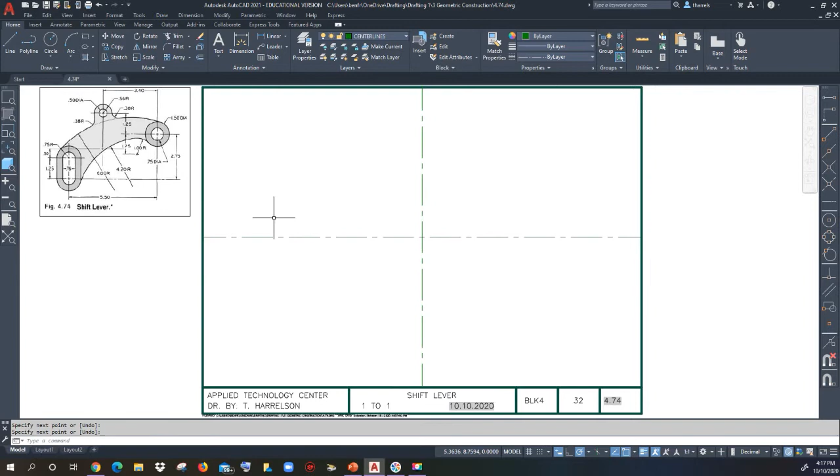So change your current layer to center line, go to the line command, midpoint, and now we're going to offset a 1/2 inch down, here to here. And then I'm going to erase this line so it doesn't confuse me.

So now this is how I'm going to construct the part. So we're going to start with this left-hand side first. So we need to offset this center line down 1.25. So we're going to go to offset 1.25.

Now, from this midpoint, this center line, we have to offset to the right before we can offset back to the left to get the center line for that slot. So you have to look at where things are based from. So we're going to go to offset. Let's put in 3.4. And then from this line, we're going to offset back 5.5.

At this point, we really need to kind of clean some things up so we're not confused when we start offsetting even more center points. So let's use our grips and let's slide some things in. I'm going to leave these two for the moment because I'm going to have to offset this up again. So we're going to offset this line up the 2.75. And then from that line, I can offset up and down 1.25.

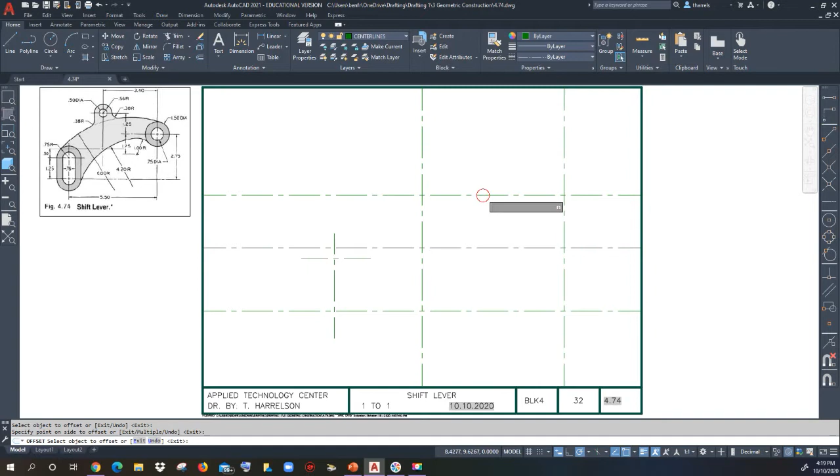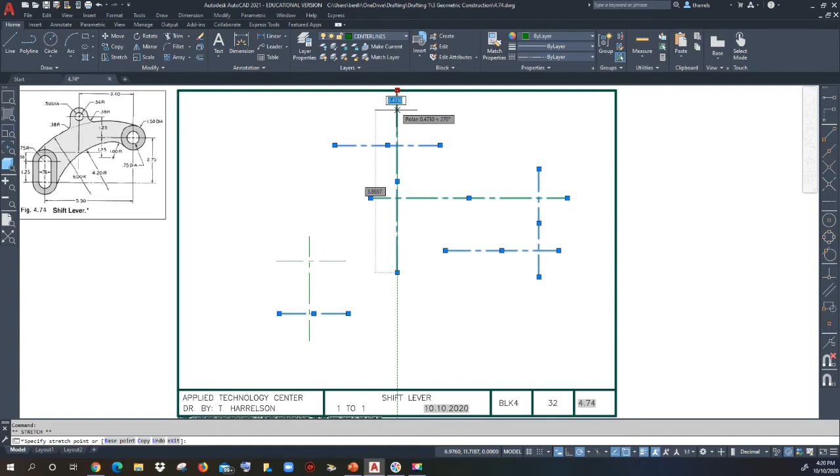Now I do need to clean some things up. So got a stray line up there. Clicked too quickly, so we'll get rid of that. Use your grips and let's pull these center lines in so we're not so confused with what is what. So look at where your dimensions are coming from and look at the lines that you just offset. Now that looks much more manageable. We don't have lines everywhere to confuse us.

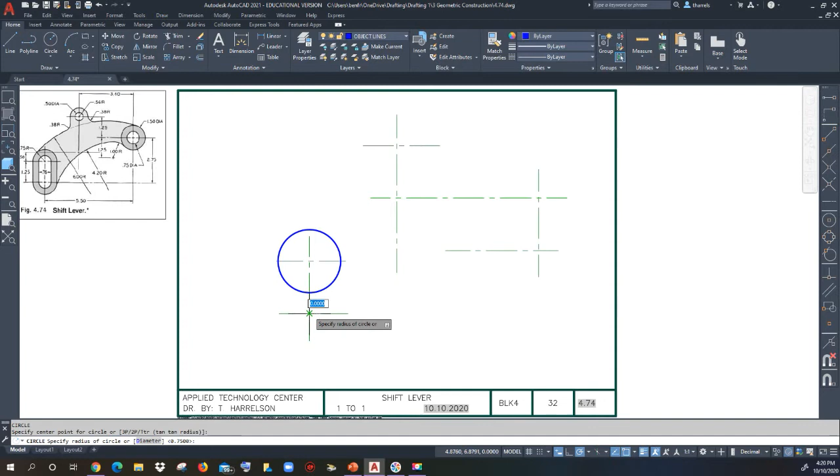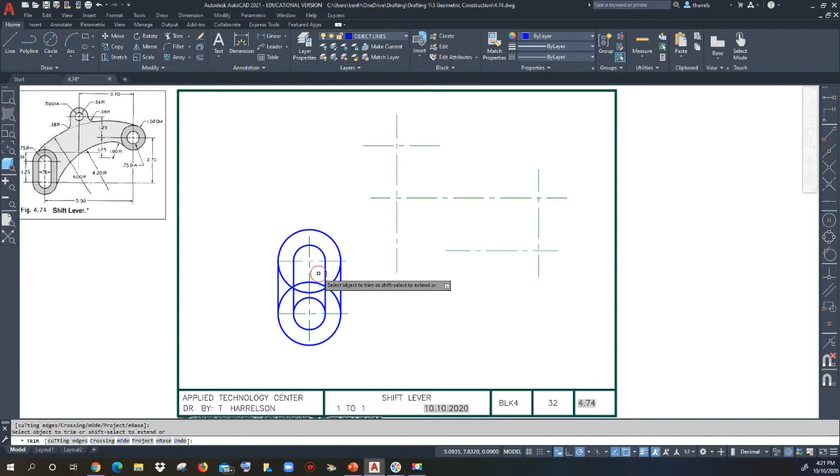So now let's change to our object layer and we can start constructing the part. So you can see on the left hand side we have a radius of 0.75. That intersection. And we have a diameter of 0.76. So now we can use our intersections and our line command. So there is one feature.

So now let's move to the right side of the drawing and place these circles. Pay attention to radius and diameter. Both of these are diameter circles. Let's go ahead and put the circles up at the top. We have a diameter and we have a radius. Now at this point, we have to think about what we can do before we put in these big curves. This large curve is tangent to this circle and this circle. So we're going to use tan radius to create that circle.

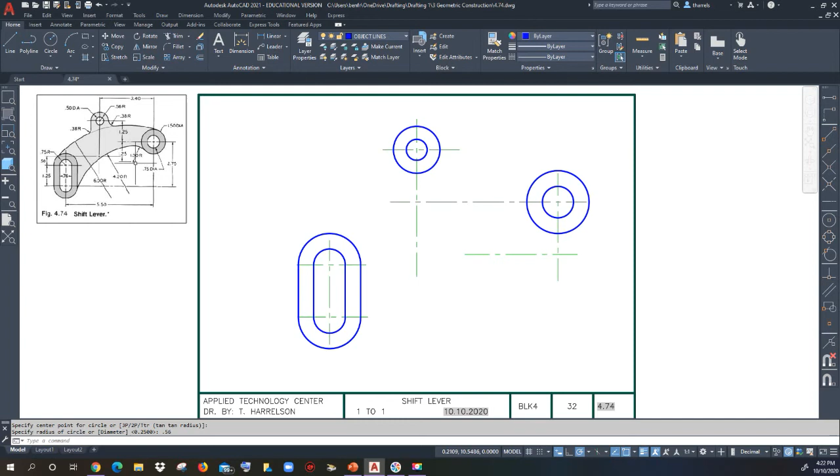This large curve, it is tangent to this 1-inch circle, but we don't have a center point to where that is. And we can't use a fillet because we don't know where this arc is. So you have to look at the part and think how you can construct this. Now on your drawing, I think I've given you the measurement, but on the original drawing, you do not have one. So you have to figure out where this 1-inch lives. How do you do that? That 1-inch circle is tangent to the 1.5 diameter. So it has to touch it at a tangent point, which means from the point it touches the circle to the center point is 1 inch.

So go to offset, 1 inch, and offset the circle out. Where it crosses that center line, that's the center point of your 1-inch radius circle. And you can erase that when you're finished. So now you have your 1-inch circle.

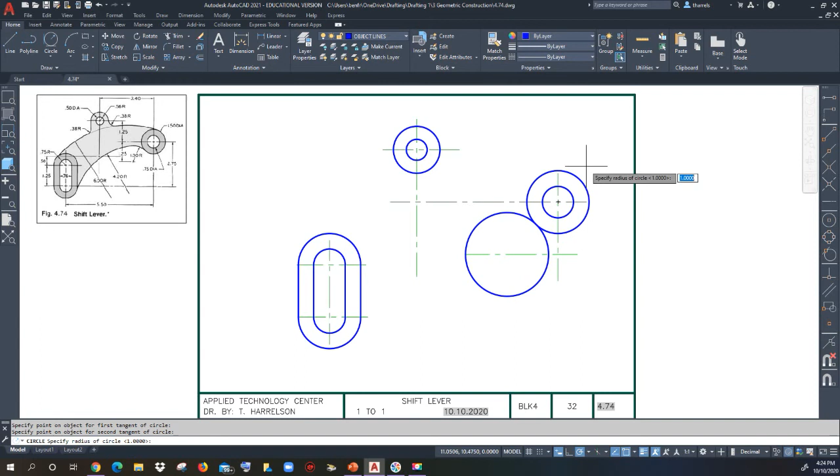So we need to place in the large arcs that are here, but we're going to use the circle command, tan radius. So when I pick tan radius, I'm going to pick the outside of this curve and then the outer right of this one. So this tells my circle to be tangent in this direction. If I pick them too close together, it's going to draw that circle in the opposite direction I want it to go. So once you pick your second tangent, it's asking for the radius, which is 6, and it creates that large circle. You can go to your trim command and trim away what you don't want.

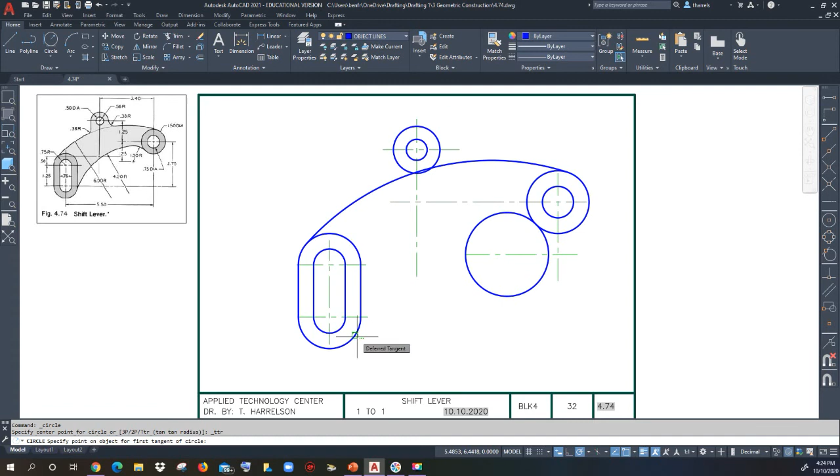You're going to go back to tan radius, pick the lower point down here on this circle and the top side of that 1-inch circle. Your radius is 4.2 and that creates your curve. Now think about what needs to stay and what needs to go. So this part of your arc needs to go away and the outside edge of your 1-inch. So it makes that little dip of a curve. And then you can erase what you don't need.

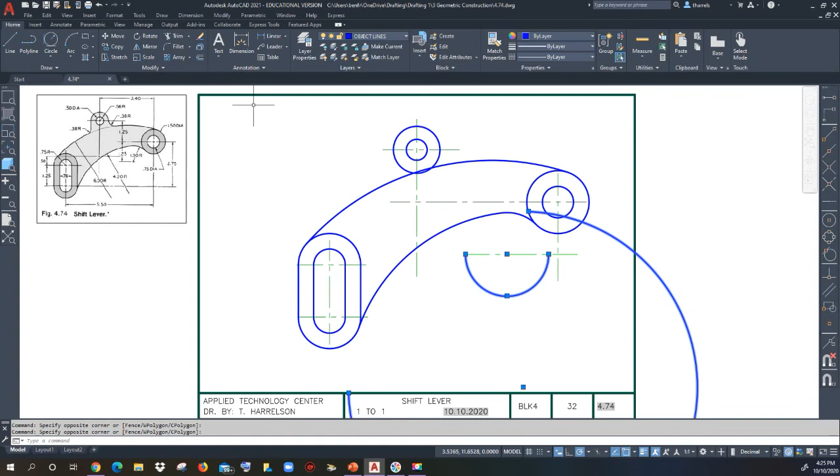So now we need to deal with this portion. So you have to look at how this is created. You have a flat portion right here. If you just went to the fillet command and picked fillet, it would curve this too far in. So just go to your line command, pick the intersection and pull it straight down. That's what you're going to fillet to. On this side of the line, it's actually touching the curve, so you can just use a regular fillet.

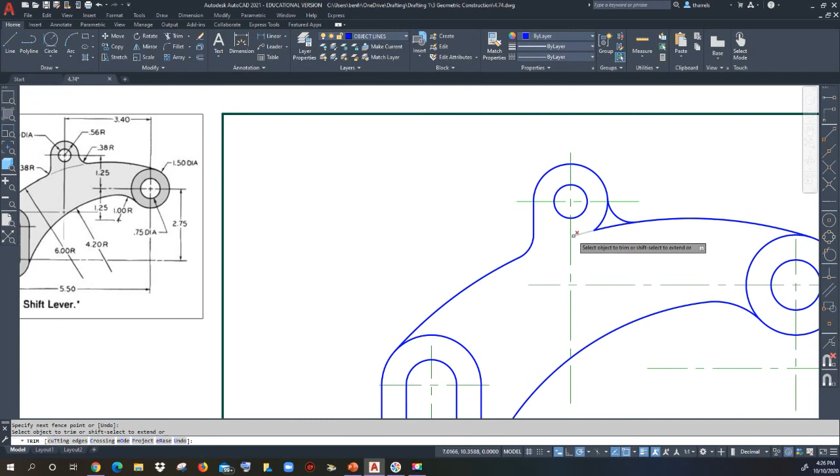So go to your fillet command, right mouse click, radius, 0.38, enter, and I need to do it twice, right mouse click, multiple. So now I'm going to pick my curves and then I'm going to trim away what I don't want. When you're trimming this part, you need to make sure that you zoom in on this little curve, because look at that, you've got a little extra piece. So make sure you get rid of that. Now your part is finished.

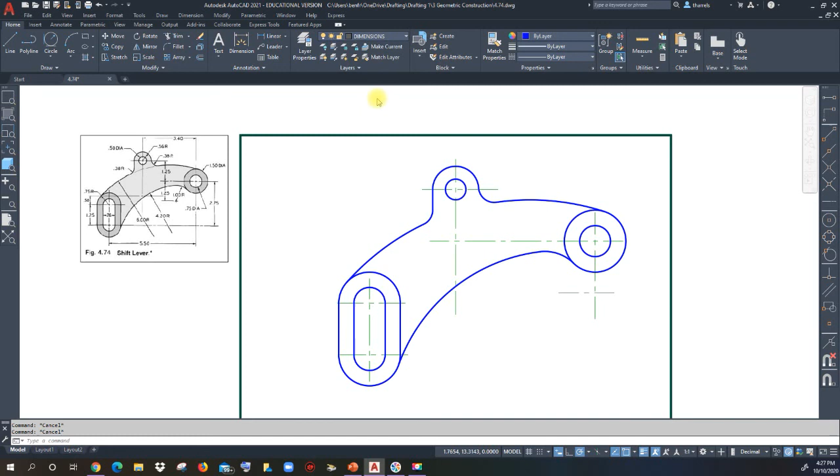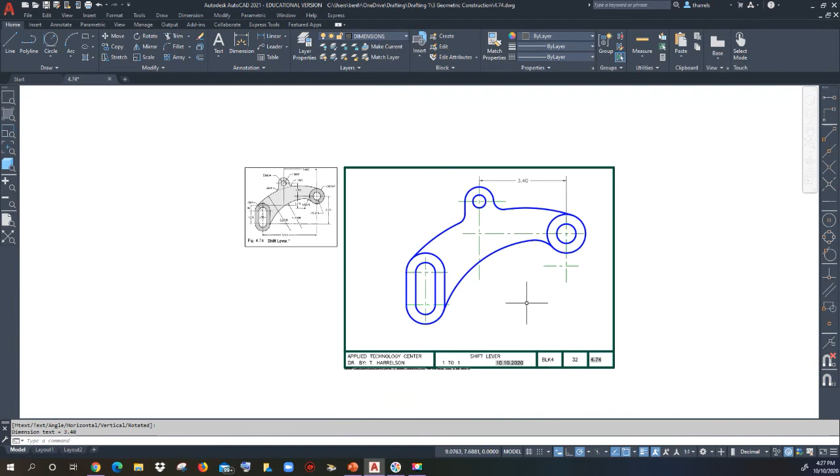You're going to use decimal dimensions. So make sure that you go up to the annotate and then your dimension panel and open that up and pick either fraction or decimals. We are in decimals, so change to your dimension layer for your decimal dimensions, and then you can start placing dimensions on your drawing. Once you have it completely dimensioned, make sure you stretch these center lines if yours are a little too close like mine are. Make sure that you have everything looking just like your part, and then you're ready to turn it in. That is 4.74, the shift lever.